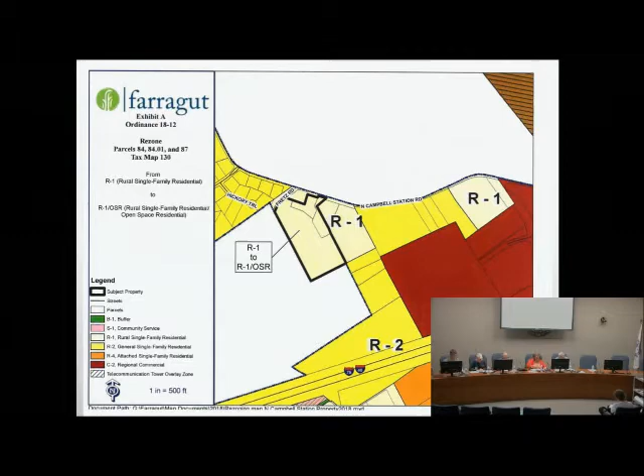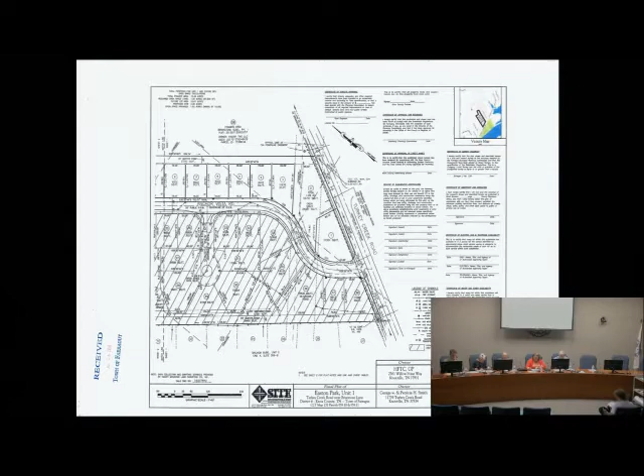Item number 7, discussion and public hearing on concept plan for the Ivey Farms, parcel 52, 54.01, 57, tax map 151, 114.32 acres, 213 lots, zoned R-1 OSR, site incorporated applicant.

This property on Union Road, north side of Union Road between Saddle Ridge and Fox Run, was recently rezoned to OSR. Previously, it had been mostly agricultural. As required in the OSR district, the concept plan has to be submitted to show how the full build-out of the subdivision would occur.

The applicant's design team and staff feel they've done a really good job with the layout, incorporating both vehicular and pedestrian connectivity within and externally to the development, which is required in our subdivision regulations and comprehensive land use plan, and is highly recommended. They've also included a very substantial walking trail system throughout the development that would tie into trail sections in both Saddle Ridge and Fox Run.

They have a large bioswale and a pretty robust tree planting plan as part of their streetscape plan. They've designed very well with the land and tried to avoid the drainages that bisect the property, along with the wooded areas and steeper slopes. There's a lot of open space, particularly in the northern portion of the property, which has more environmental constraints.

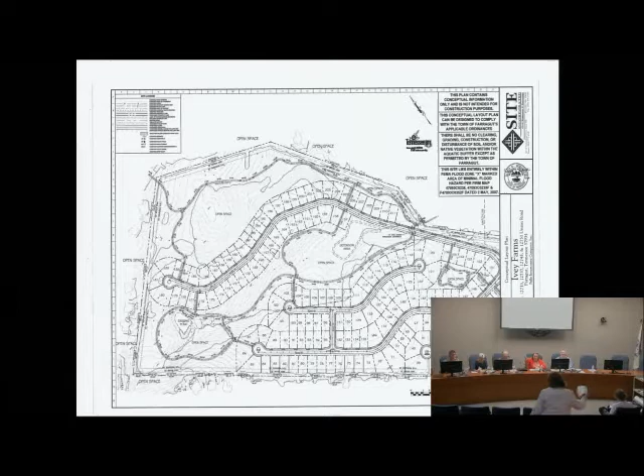Is the applicant here? I'm here, Robin Askew. This is David Robinette, the civil engineer from site.

I'm Robin Askew, I'm the attorney for the applicant. I know nothing about swales or retention or any of that, so we'll let David address those issues. I'm just here to respond to any issues that come up with respect to the regulations.

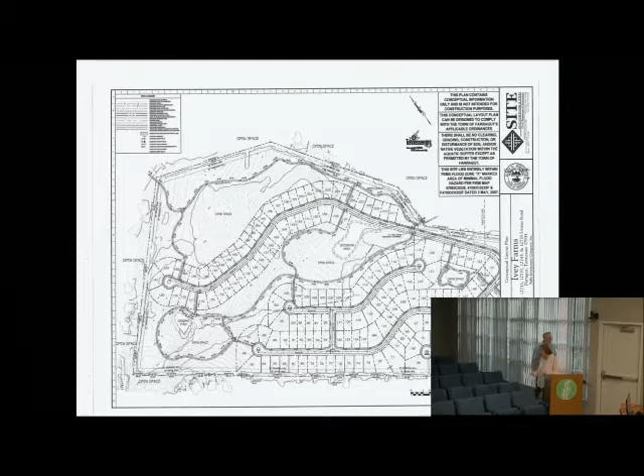David Robinette, 228 Oren Road. Sorry I'm late. You didn't expect us to move this fast, huh?

We read all the conditions, we're good with everything. Obviously on the 114-acre site, there's a lot of things that's going to be worked out during the preliminary plat stage, so we're good with what we have.

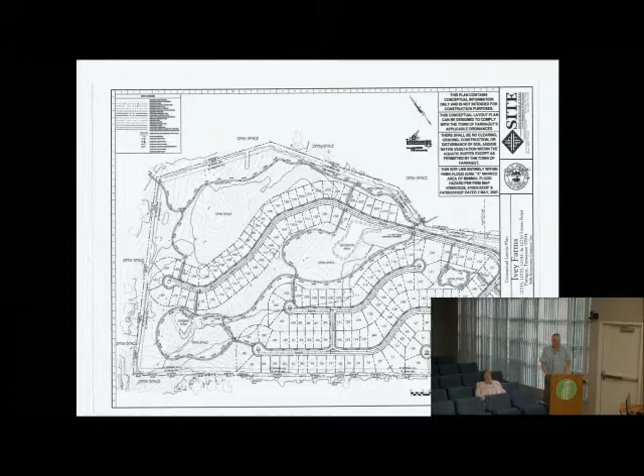Okay, any other opportunities for pedestrian connections over to Saddle Ridge? There's one, you see the one at the top left of that screen right there.

Is that Saddle Ridge or is that Fox Run up there? Well, that's Fox Run. There's no sidewalk in Saddle Ridge, that predates a lot of our pedestrian connections.

There's one opportunity, Mark, I don't know if you can see it or not, but there's a cul-de-sac that dead ends almost at the property just north of that area, right in there.

If you drive out there, those folks must have a good time at the end of that cul-de-sac. Yeah, there's a fire pit and all kinds of stuff there.

It could connect there. I don't know if the right-of-way actually goes all the way to the property line. It looks like it's short of the property line, but there is a cul-de-sac that's within 15 feet of the property line right there.

I'd like to, it'd be nice if we could get - you guys have done a great job with a lot of circulation, pedestrian circulation, and I applaud you for that. It'd be nice if there was just a little more connectivity, but it may not be possible with an older subdivision.

We just didn't allocate future connections like we do today, but if we could, I think we've got a couple over to Fox Run - one down by probably where the Fox Run clubhouse is, my best guess. Then you've got one up at the top of the hill, probably close to that water tower. And we're going to connect through our clubhouse out at the front to the 10-foot trail that's going to be built along Union Road.

Well, you've got that pond behind, you've got some topography - it doesn't make a whole lot of sense to battle that topography up there by that pond to try to connect those. I mean, I think they've done a good job of putting this plan together.

It'd be nice if we could figure out maybe another pedestrian connection on the west, southwest side of this up to Saddle Ridge, if we could figure it out - it just may not be possible. There's a detention pond on the left-hand side of that sheet where Saddle Ridge is - you see where it says open space right there? That's actually a detention pond that we might grade-wise be able to get area, something. And if that's - those contours are fairly tight in there too, but maybe you could work across the slope.

But I mean, that's going to require - I'm sure that's owned by the homeowners association over there, so you may or may not get cooperation. I don't know, but it seems like that would behoove everybody.

Because it'd be a nice walk. Having all those paths that go through your open space for folks that jog or walk or whatever, it seems like everybody would really enjoy that. It'd be really an additional amenity for Saddle Ridge with no cost.

Yeah, the one in the upper left would connect to Fox Run, but it's also connected - that segment goes down to connect between Saddle Ridge. Right, that's the one that connects both. Yeah, that's up there by the water tower, I think, and gets you down to the gas line easement or TVA - yeah, there's a TVA transmission easement where they changed the poles on a couple of years ago.

So that gets you through to Saddle Ridge that way, and it helps connect that street. That, and like I said, there just may not be another obvious location to connect.

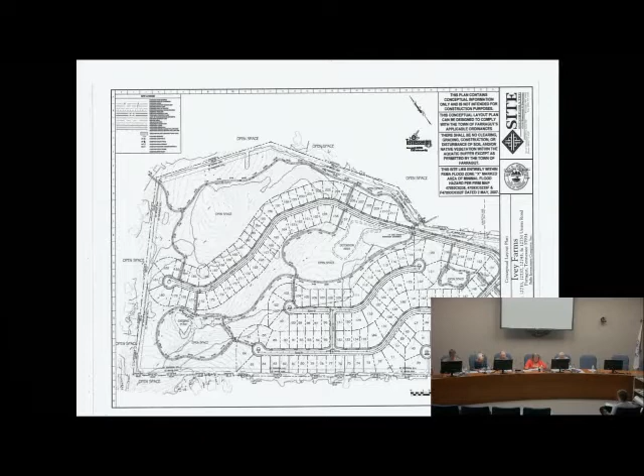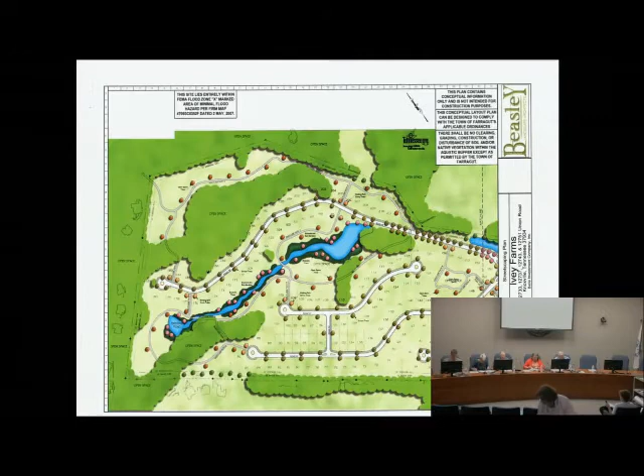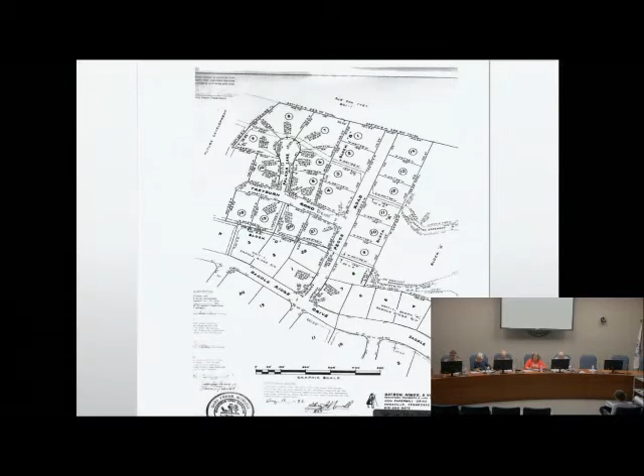I thought we're making pretty good progress tonight. Discussion and public hearing on approval of the request from Comcast to install underground conduit along portions of Parkside Drive, North Campbell Station Road, Campbell Lakes Drive, and Lake Edge Drive. Comcast is the applicant.

Are you here for Comcast? Well, I told him he probably wouldn't need to be here until about 7:45, so I was wrong. So anyway, I could go over this project briefly, and if you have questions, they probably will be here pretty soon.

We've met with the designers and the applicants two or three times to make sure they get the conduit within either existing platted right-of-way or existing utility easements that are normally along property lines or just outside of rights-of-way. And they've done that with their plan.

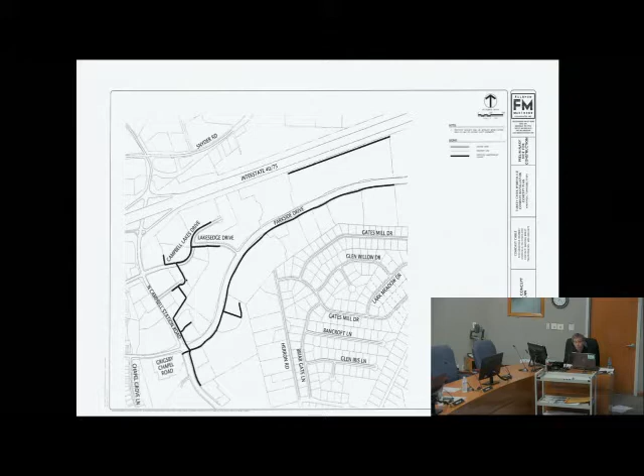We got through, oh yeah, there's Billy. Hi, Billy Fulgham, 10330 Hardin Valley Road with Fulgham McIndoe and Associates. I apologize, I didn't hear your question. Oh, will Farragut be able to have Comcast?

I don't know. It's agreements and all sorts of bureaucracy that have to be navigated, hoops have to be jumped through for that, but I'm not real sure. It'd be nice to have a little more competition, wouldn't it? It wouldn't hurt our feelings.

I can talk to you about the conduits, but not about that.

Billy, while you're up there, the line that goes back along I-40, next to the walking trail, those utilities that are in that easement now, those are overhead, correct? Because you're right next to the electric back there along that trail, behind the stores. Or are those also underground?

They put underground up there. Well, I think the ones next to I-40 might be overhead, and then they go underground when they pop over to Parkside Drive. I think we asked Adam about that, and I don't remember, but it seemed like it was something related to the existing overhead users not wanting that additional user.

I don't know, that's kind of vague. Right next to that trail, obviously with directional bores the impact is minimal except at your pedestals. So I'm just thinking it may be that everything in that easement is overhead except what this is, so you don't have a whole lot of conflicts. But otherwise, it's going to be real tight to get it in right there.

I'm trying to understand exactly where this conduit is going to be affecting greenways - can you clarify that for me? Well, there's a lot of pedestrian areas that are inside right-of-ways and easements, and that's a natural place for utilities to go. I'm just trying to understand where, on Parkside, because I walk in that area. My question would be, how long do you expect those greenways to be unusable?

If you're digging them up, we won't be able to walk on them, correct? I'm just trying to understand.

Except wherever their connections are. They have to get a boring machine to have access. It actually bores underground for a long distance, and then it pops up. They basically make their connection and put in their little pedestal, a small green pedestal sitting around.

And then normally with stuff like this, they won't close the walking trail. Obviously if they had an issue with rock or something unforeseen, there might be a temporary closure. But most of all, what they're proposing is very common with other underground utilities. They go where the sidewalks and walking trails go. That's just part of it, the natural place to put those utilities.

We hope there wouldn't be any closure unless something happens, like they hit a water line or gas line and have to dig everything up to fix it. Then they'd do what they need to do, and maybe close it then. So it would just be something unexpected.

I'm sure it's something you'll get to fairly quickly if that happens. Yes, the production work was going to be with that boring, so if they encounter anything else, they need to get that done fast. So are we adding a letter of credit, or does number 3 take care of that?

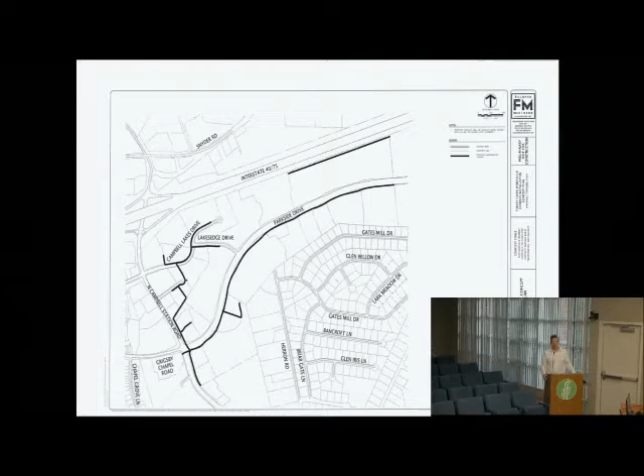Noah, are you going to make the motion? I am. I'm going to make a motion to approve a request from Comcast to install underground conduit along portions of Parkside Drive, North Campbell Station Road, Campbell Lakes Drive, Lake Edge Drive, as well as I-40, subject to items 1, 2, and 3, and posting a bond or letter of credit as deemed appropriate by staff.

We only accept letters of credit, so you might want to revise that to eliminate the word bond. Second? Second. All those in favor say aye. Aye. Opposed? Thank you, Billy.

Yeah, we don't really want to use a bond.

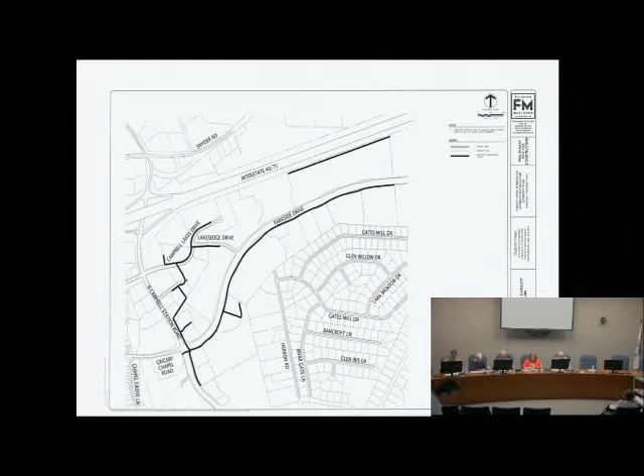Item number 9: discussion and public hearing on the site plan for Knoxville Farragut Storage LLC, 11775 Snyder Road, 6 acres, Zone C-2, Knoxville Farragut Storage LLC applicant.

This involves a site plan for the former U.S. Golf site at the western intersection of Snyder Road and North Campbell Station Road. The proposal is for 3 freestanding self-storage buildings, 2 of which would be 1-story, and 1 that would be 3-story. As you may recall, a conceptual site plan was presented to you back in March.

Since that time, we've formally removed mini warehouses from the C2 zoning district, but this particular property was temporarily exempted from those provisions, since we knew they had the intent of developing this as a mini warehouse.

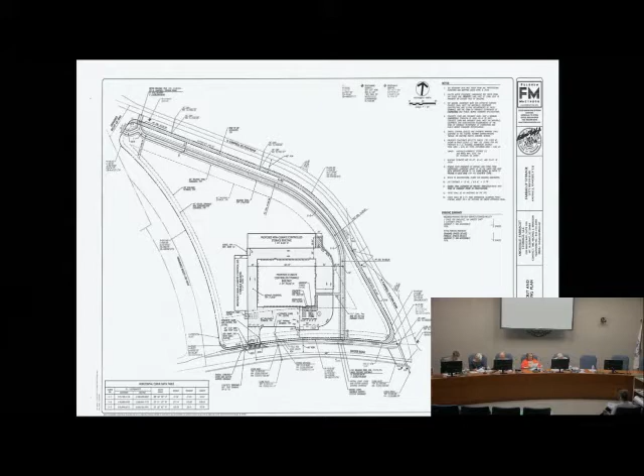The existing building and most of the site would be demolished and redeveloped as part of this. They're also moving the driveway access further to the west, further away from the intersection of Snyder Road and Campbell Station Road, which is a good thing at this point.

There is a platted right-of-way along the western portion of the property, but whether that ever becomes a public street is kind of up in the air at this point. That was platted many years ago in anticipation of possibly relocating the interchange, which hasn't happened yet, and we don't know whether it will anytime soon.

So for the short term, the access point is in a preferred location. They're also constructing a walking trail that would basically parallel North Campbell Station Road, which is a substantial benefit to the town. In staff's opinion, it's a pretty long section of walking trail, and it's very well separated from Campbell Station Road.

They also have a landscape plan going to the Visual Resource Review Board next week for the project's landscaping, and they'll have some street tree plantings along the walking trail.

The remaining staff comments on the site plan are at your places, and probably the one that needs a little more discussion deals with the buildings themselves.

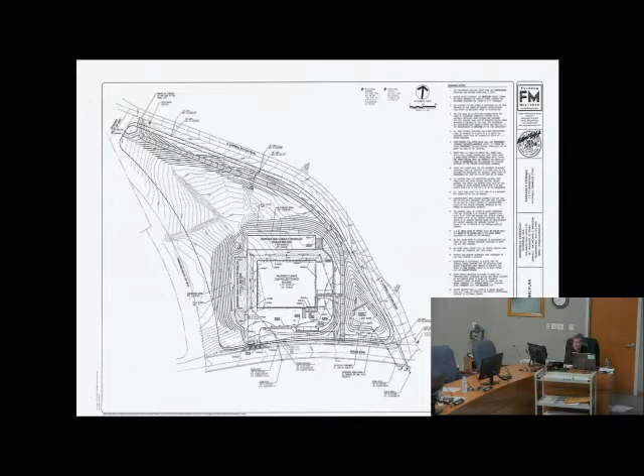This is the grading. You can see most of the grading is within where the existing development is present. This is what the one-story buildings are proposed to look like.

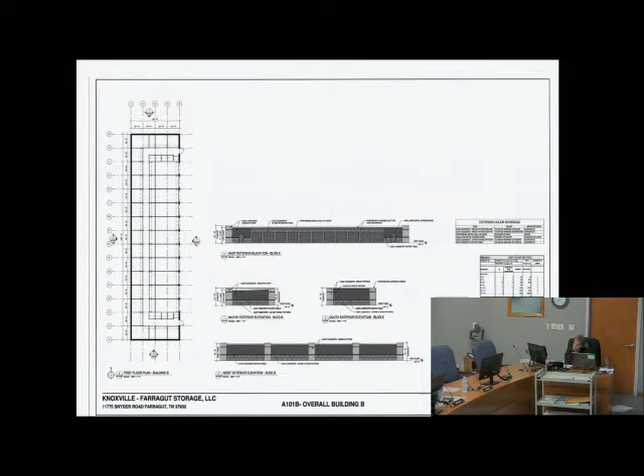The architect is here, and she can go over the appearance of all three buildings in more detail and the materials they're proposing. We certainly think some of the materials would constitute masonry, but there are others that we do not feel would meet the language and requirements of the architectural design standards in terms of masonry.

They are proposing some concrete areas, and the design standards require that if you're going to use detailed concrete, it has to be in a form that resembles traditional masonry panels. It has to be detailed such that it's similar in scale to genuine brick or stone, has to have mortar as part of the material, and has to be mortared in place to have that authentic look of masonry.

With that being said, I think the applicant's architect is here, and she could go over what they're proposing and answer any specific questions you have. I've got the old materials board, I don't know if that's still relevant, or if you wanted to come up and show anything.

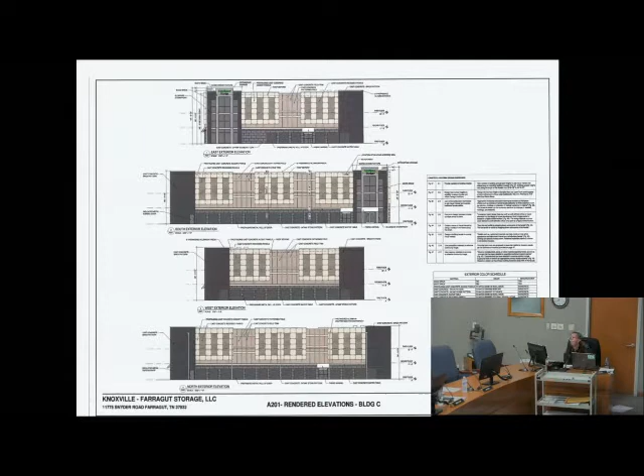Have you anything on the civil aspect of the plan? Well, we've got some civil work out, where the cut lines are to fit into the topography there. We're moving some of the trees.

Are those slopes going to be just seeded? Any riprap involved in any of those? No sir, they'll be seeded and matted. So like 3-to-1 slopes? Yeah, 3-to-1. 2.5 to 1 on this one, I think. Just have to be matted on the west side, that's about as steep as you can mow. You mow it, I wouldn't want to mow it on a tractor, but you could walk behind it and mow it.

I want to say thank you for that walking trail. We always hoped we'd get a walking trail through that property on that side, all the way up Campbell Station. We know it's a big expense, and it's a great community amenity, and we thank you for that.

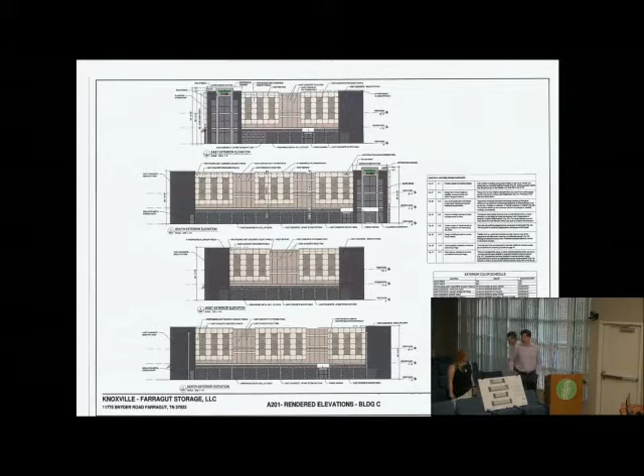Tell us who you are and give us an address of your business. Michael Manson, owner representative of the property on Snyder Road. Mailing address, 200 Wingo Way, Mount Pleasant, South Carolina.

Gretchen Weaver, I'm with SAA Architects. Address is 600 North Hartley Street, Suite 150, York, PA. I brought those.

Yes, we'll open it up to you all for any questions that you may have. Obviously starting with Billy, what you just did, and then anything associated with the architectural.

Yeah, that's still the same information. Thank you for saving those.

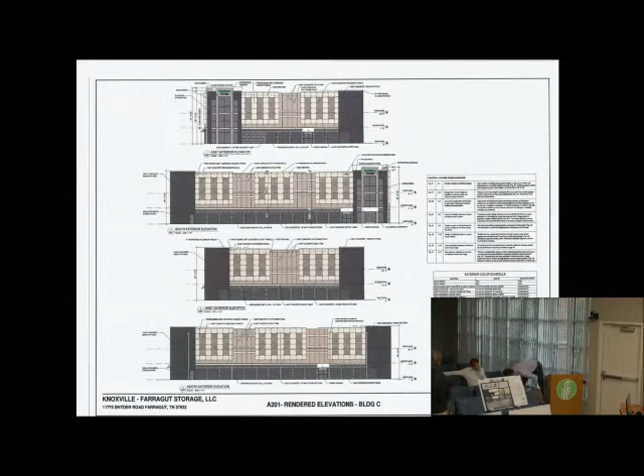I think it's remarkable, you guys. I'm seeing maybe just one retaining wall that's not that tall, and I knew that site someday was going to be tough to figure out how to put a grading plan in there and deal with that topography. The only one I'm seeing is at the northeast corner back there, which looks like a little short couple of feet, and that's it. I think it's remarkable that you guys figured out how to do this.

Obviously, I assume you're using the back of the storage, actually incorporating the foundation wall into your retaining wall, which is a great way of two birds with one stone. That way you can hide it, you're not looking at dealing with that retaining wall's maintenance and expense. So I applaud you with that.

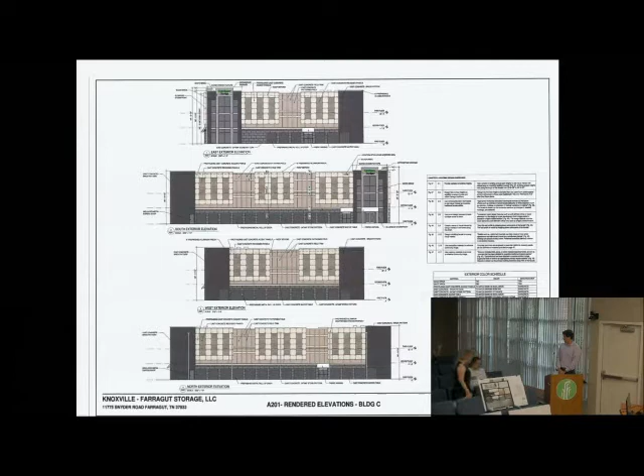Do you want them to go over the materials they're proposing specifically so you all have a feel? Yes, I think any other civil design or site design stuff that anybody had questions about, and then we'll jump into architecture. I think we're pretty good with your civil design.

Obviously, you've eliminated one of those curb cuts, and we're happy about that. And your walking trail is awesome, and you've done a good job with it with that site.

Oh, that won't be an issue. That's a typo, had to be.

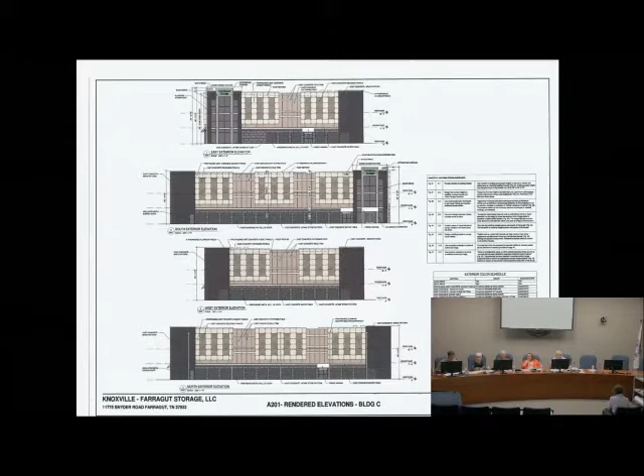What we can see here—Mike, could you help point at stuff on there for me? So we have black and white brick options, and they are at the entry to the facility. That'll mark the corner of that intersection as well. And then beyond that, for the base, we're using a cast concrete. This is a blow up of the image.

These are 24 by 48, that's a standard stone size, and that does have the ability to have a grout joint, so we would have that filled. This would be a stained product, and it won't have a sheen to it. This is the mold, this is actually an image of the actual mold, so it has a little bit of a sheen to it, but in real life it wouldn't have that.

We are proposing that it would get stained about this color, which is a fairly natural stone color, mixed in with the regular concrete. For the areas that we have called out as the cast concrete that's brick, this is actually an image of the brick itself. This is a product that comes out of the mold, so you can see that there is a significant dimension to it, that this is actually created from real brick. And then we would be able to grout that joint if we chose to, or leave it as a rake joint, depending on how we want to use that.

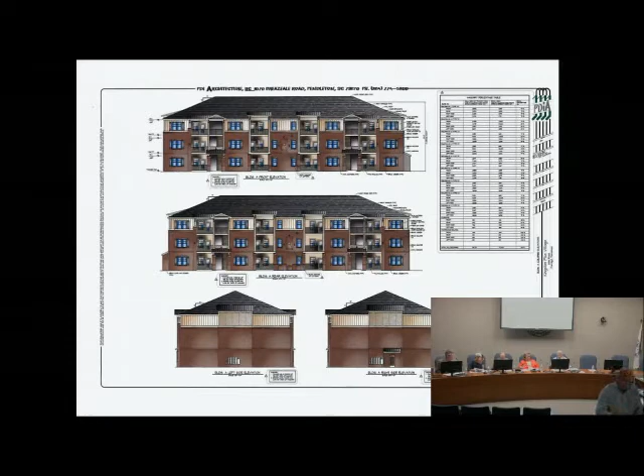This particular phase would include the multifamily portion. As you all know, there's also a big box that's part of the overall development and a couple of retail buildings at Kingston Pike. This particular phase would include, as proposed currently, about 228 apartments, and it would provide for the principal areas of open space for this particular development.

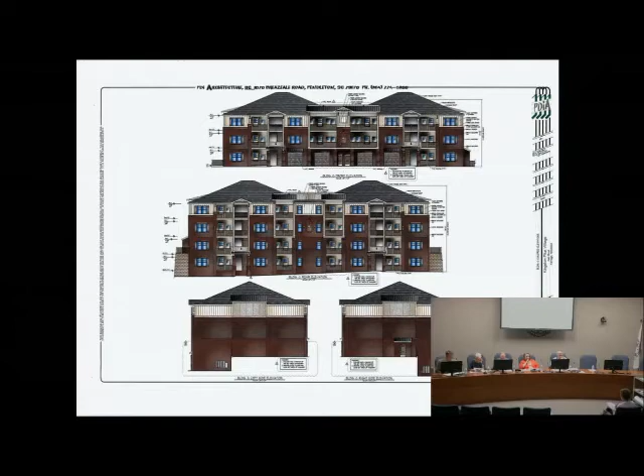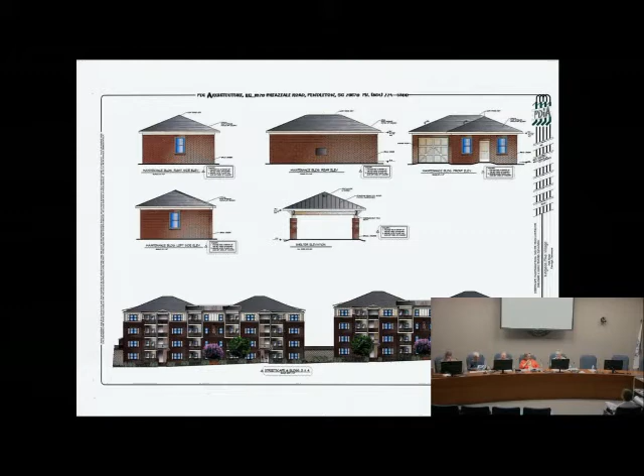These are some renderings of what the apartment buildings are proposed to look like. 3- and 4-story buildings, as you can see there. There's the clubhouse. And this particular phase, this is kind of what they look like from side view, street view. And then here's kind of an aerial view showing the green space and the buildings on the property there.

This is about 10, almost 11 acres of the 18.5 acres that's part of the planned commercial development. We talked about this as a workshop item back in December and then in January, and then there were some items that the applicant brought before you all last month for some additional clarification.

The staff would remind you that this is a planned commercial development, as we've talked about in the past. It is supposed to be held to a higher standard than what you would typically see in a regular multifamily or commercial development. There are certain key things that these type projects are required to have: integration within and to what's around them, good pedestrian and vehicular connectivity, a quality design, and then the provision for functional common open space that could be actively used.

The functional open space is really a key component of this type of development. It's a type of development that if you go to, it would signal something different from what you would typically see in this case, apartment development. It would have some kind of identity to it that you wouldn't otherwise be able to find in most apartment developments. The remaining staff comments on this plan are included at your places.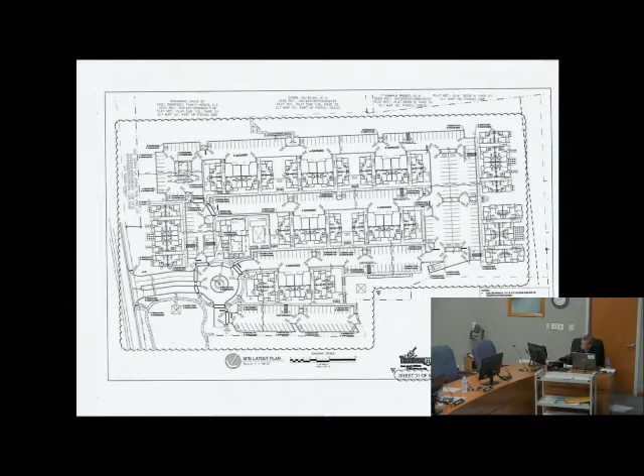And I don't know if you want to just talk about—let's do one at a time. Yeah, that's fine. I'm going to jump in. Yes, sir. Do we count the garages as parking spaces? Yep. So that's already been put into the calculation? Yes. So even including the garages, you're still short 41?

Well, if you remember correctly, when we came in front of you to rezone, our first plan, staff and y'all said it looks like a sea of asphalt. So we took out almost 120 parking spaces; we have not added any parking spaces from the concept plan. This is the exact number of parking spaces we've been having since the approved concept plan. You've subtracted parking spaces from the concept plan? Some for putting in the maintenance building, yes. We lost 8 spaces there. Where's the maintenance building? Is that the little gazebo out front?

No, that's the one up in the upper left, isn't it? Upper left, right? That's the maintenance building. Okay, so you lost some parking there.

We lost 8 spaces there. Well, we actually lost 6 spaces, but the 2 spaces that are there are also used for car washing. So if someone's washing the car, they're parked. But if they're not washing the car and somebody wants to wash the car, then we got a problem. We'll have to sort that problem out.

Are the garages 2-car garages or 1-car garages? 1-car garage. Okay, and so you're getting credit for one spot for each one of those garages. Yes, which makes sense. You park a car there, that's a parking spot.

Okay, and the tenants will, correct me if I'm wrong Pat, but 2 of them have access into units? Yeah, 2 per building. Each of the 4, 2 of them have internal access to a unit on the same level. Well, the one that suffers if you don't have enough parking is you and your tenants.

What distance would I have to walk if I parked on the grocery store property closest to the apartments? It depends on which apartment you're in. Well, to the front of where the apartments start, the building directly to the right of the roundabout, you'd be walking an additional 50 to 100 feet. Now if you're parked in Building 9, all the way in the back corner near the maintenance building, then yeah, you're going to be walking a significant distance.

I mean, again, going up grades, yes, you would be going up some grades. I'm not going to lie about that.

At the last meeting, the developer, who couldn't make it tonight, told you he's about to sign the lease for the big box. Once we get approved on this, he's already asked me how fast I can get the drawings done for the grocery store, so that all that parking is complete at one time. This is going to take 18 to 24 months to build, correct me if I'm wrong, Pat, and the grocery store will take about 9 to 12 months.

If we're following right along, the parking will be there. I understand Mark's concern, and it's a concern of ours too. We really were trying to get the numbers up to 1.75, but if you remember correctly, when we were going through the concept plan, we kept being told take parking out, take parking out.

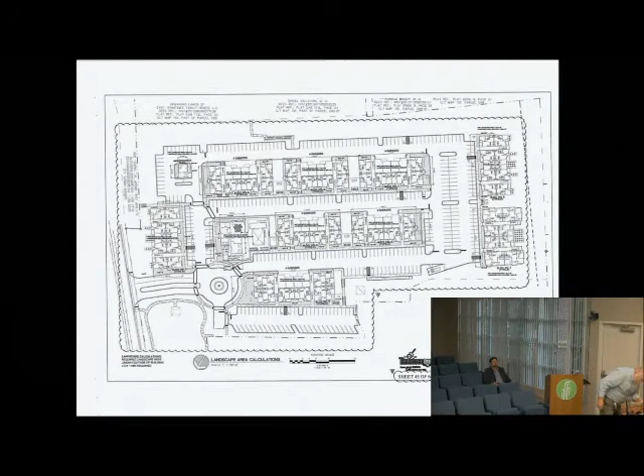Is it like that roundabout? No, this one here. We're doing that as a calming device, a speed slow down.

Excuse me, let me get back in front of the mic. We're doing that because there's a trench drain right before it, trying to catch the stormwater, to encourage capture of stormwater.

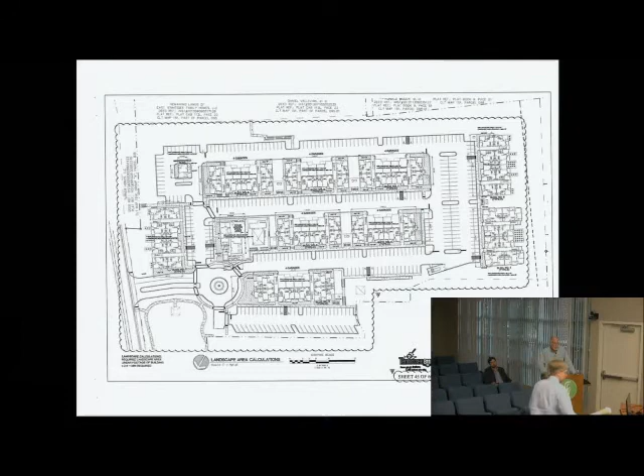That is an expense we may not need to do, because I don't think we really need a bump. We may instead do a channel drain, a 12-inch wide trench drain across there, which can capture a whole lot of water before it gets out, going from curb to curb.

I guess what we're saying is if you're going to do the raised crosswalks, we probably need to know what they look like, and if you agree, we want to take them out, that's fine, as long as the engineer can determine whether your storm drainage works. That's why I said, if we put them in, I will provide a detail.

Item 24, that's something I've got to get from Alan Childers. We just haven't had a chance, him and I have been playing phone tag.

Signage, that should be easy. We have stop signs on the site layout plan now. Well, maybe you need some cut sheets or details as well. There's a detail on the detail sheet for a stop sign.

Well, you can just coordinate with staff on that. Okay, coordinating, yeah. Item 26, I'll coordinate with Daryl. Item 27, yes, we'll coordinate that. Items 28, 29, 30 are all standard things, so those are just fine.

So what I'm hearing is that you want to spend some time talking about the parking, shared parking items 2, 3, 4, and possibly 6.

Six is something that Pat and I need to coordinate a little bit more, so I'm going to put a check mark by that. Pat and I can coordinate that a little more, because that's the screening and stuff, like where we're going to put where we expect to have a transformer screened or whatever.

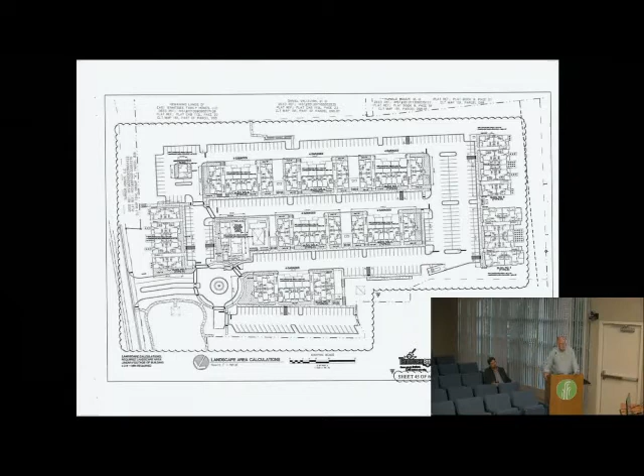I think I have your master plan. Why don't you come over and verify that this is the plan you guys are working off of? If it's an incorrect plan, then we're wasting our time looking at it. I can tell right now it is.

I wonder if there'd be a better location for the commissioners to take a look at this, other than me sticking it in front of Miss Betty. You mean put it in a chair next to Ed, or I could come here. You know what, I got an idea.

Let me try this. This doesn't help the folks in the audience or folks at home enjoying television on a Thursday night. I'll put it on this board. We've got a big audience tonight, I bet.

Why don't you come over here? No, there's some clips on this if you want. Marcus bringing out that light thing, he's gonna do some magic. Anybody in the audience that'd like to come up and take a look at it?

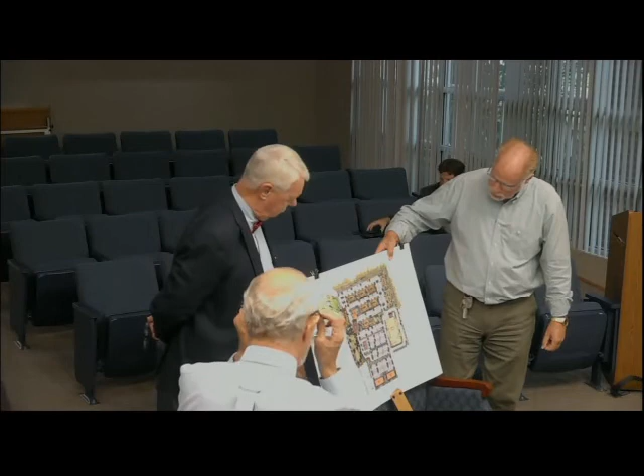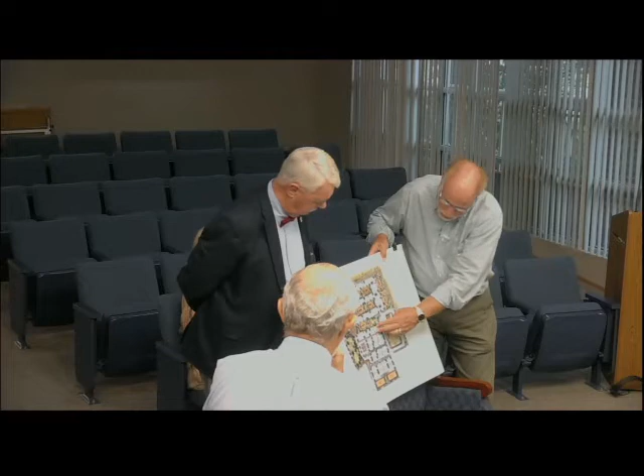Mr. Bilek, why don't you start pointing out where you envision this overflow parking for your apartments to be? In this area, well, this area right here is already allocated. This area right here and some of this area right here.

Because, be honest, how many times do you see many people park near a gas station? Well, you're right, one employee may be in there, and that's it. So, except for this being a grocery store, except for Thanksgiving week or Christmas week or a holiday week where they're getting a lot of traffic,

all of this area right here will probably never be parked in. This area, and some of this area over here, probably won't be parked in either. This parking right here is for employees.

I don't know how many employees this grocery store employs, but if it's more than 12 or 17, they can go right in here. But 17 is already being eaten up right here. So there's a lot of extra parking on an average day for this grocery store.

The unusual days, like the week before Thanksgiving, the week before Christmas, any major holiday, that 4th of July, where people are gonna go barbecuing and get their supplies, they're gonna be here during the day, but at night, if need be, they can use this area right here and this area right here. From here to here is approximately 100 feet.

Show us the route if you were going to go up to that open space area. Right here? Yeah, show us that route. You don't want somebody to walk all the way over to the roundabout. No, and they don't have to. They don't have to.

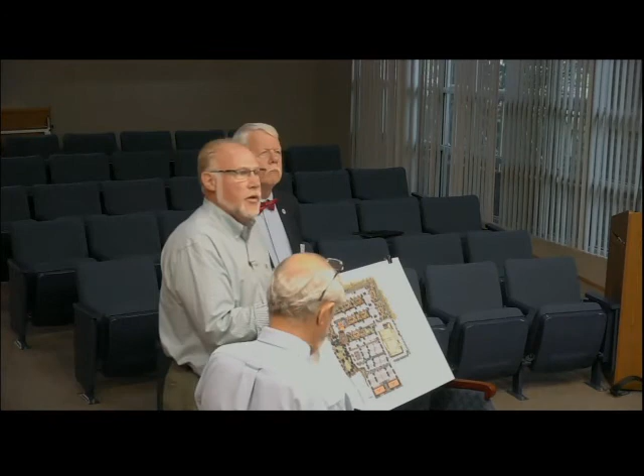This is a set of steps that comes up into the open space. This is a handicap space for someone who wants to, whether they're coming from down here or up in here, they can come in here, park, and this handicap ramp gets them down to the elevation, because we've--

Of the raised grocery store. This gets you all the way down to the green space, because it's 6 feet above, so it's that terrace that we talked about a few months ago. I think actually I like that idea.

I'm just trying to figure out, we have a set of steps here that go up from the terrace area up to the parking. And then from there, you could go across on the sidewalk to get to this apartment over here. Yes, it's a long walk.

Unfortunately, life deals us some curveballs every once in a while. Well, like I said, it's not us that could potentially suffer. It's your client's tenants. So we're just trying to figure out, does this make sense?

Are there other tools we could use, would it make sense to occasionally have a parking spot designated as a pickup drop-off area? And most importantly, I think, is there enough handicap? Now, you get credit for your handicap spots. Is there enough handicap? Because we have more than enough handicap.

In fact, that's one of the things. Whatever the normal ratio is for apartments, I would think we need a little bit more handicap spots than typical. We have, I'm trying to remember, 2, 4, 6, 7... 8, 12, 14, 16 handicap spaces for this apartment, which, correct me if I'm wrong Pat, but we only need about 9.

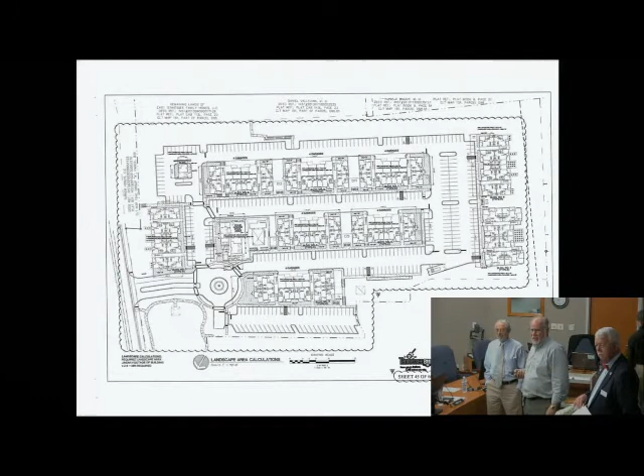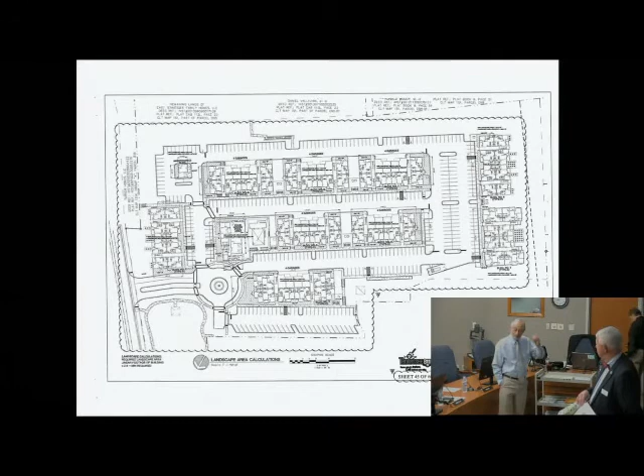Oh, put you on the spot. You have that on one of your plans, Mark? Actually, you have. It might be. Seems like I saw that somewhere. Yeah, it's not in that one. Not on the elevations. I think I saw it on a site plan. You know what? I think it's in here.

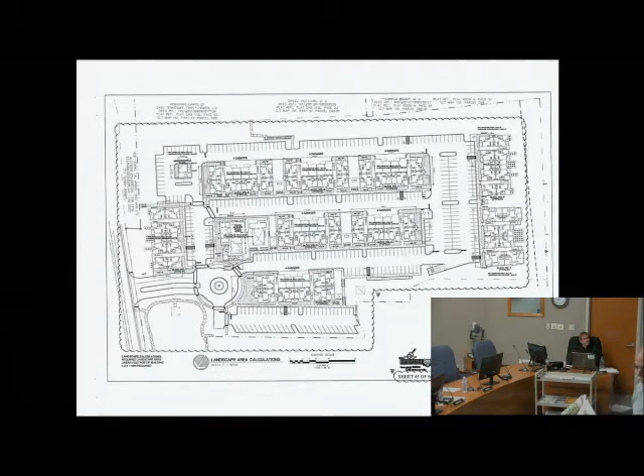I apologize, I should have that ready, but what I was wondering is, if you have so many one-bedrooms, then realistically you only need one parking spot per bedroom. I did a project in Knoxville, downtown in the waterfront area, and they dropped the parking ratio down to less than 1.4 per unit. I thought that was interesting. Maybe college students without cars.

I guess I like where Rita's going with this. The problem is our ordinance does say one thing, so we've still got to figure out how to address this. If you have an abundance of one-bedroom units, the odds of needing 2 parking spaces all the time are low, you might have a guest come over, but generally you're gonna have 1 car there. Yep, and it'd be kind of nice to know what those ratios are.

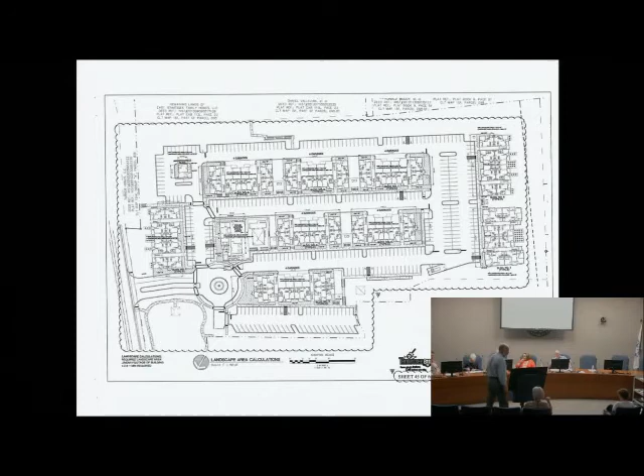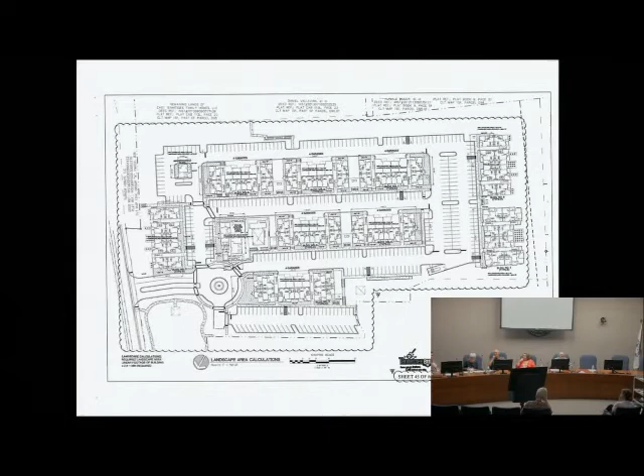I thought we had that on one of the plans. I don't remember actually, I apologize. I can tell you we have a relatively few number of 3-bedrooms. I think 18 3-bedrooms, which is right at a 10-11% ratio, I think. And I think we're close to 50-50 with 1-bedroom and 2-bedroom units.

I think for me, 3-bedrooms would be family units, 2-bedrooms might be roommates, thus you'd have 2 cars. And then 1-bedrooms, odds are 1 car, unless you're having a Super Bowl party and have a whole bunch of people come over, and then guests can park in the overflow places. I've seen 20 years ago the thought process was 2 spaces per unit.

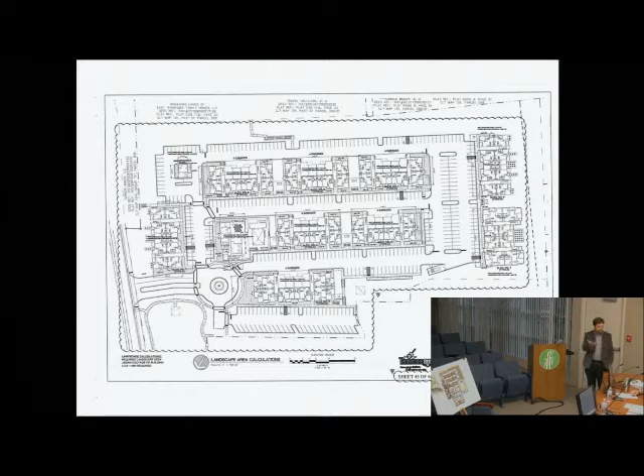And it has, like what was talked about, been coming down since the last 5 years, I think. The younger generation now, it's changed. Part of it is for the same reason you have the bike racks included in your requirements, I mean you get a lot more of that. Yes, which we do have a proper number of bicycle spaces.

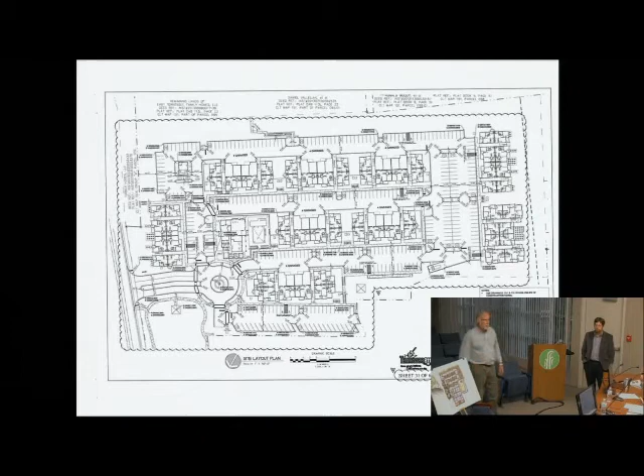I mean, Mark, correct me, we're 41 spaces off, correct, from the parking ratio? Out of a total of what? How many total parking spaces do you have for the apartments? Let's put this in perspective. The number I'm thinking is 358, that's what we have shown for the whole development on the plan right now.

So a little over 10% deficit. It's not that high, I don't believe, Mark. Is it not that much? I bet that's for the whole thing, like Pat said. That sounds pretty high for... well, how many total units? Hold on, I've got it guys. How many units? 556 units - no, how many total units do you have? Let me do the math. 228, well 228 times 1.75, right?

Okay, let's do the math here. So you're required to have 399, and we think you're 41 short, so you're at 358. So you're about 10%, if the total requirement's 399, 10.5% roughly speaking.

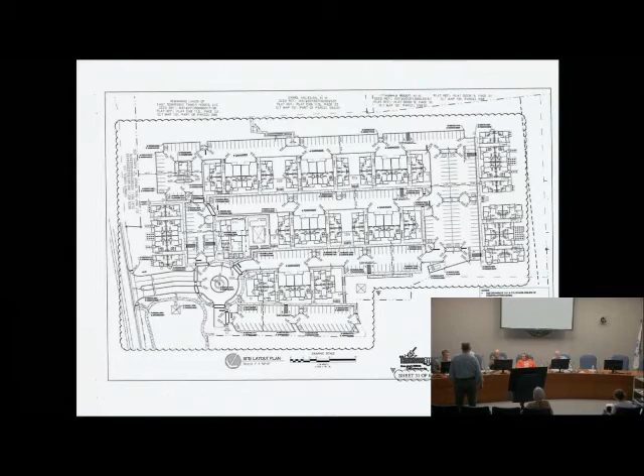Well, like I said, it's your tenants, it's your tenants that may be unhappy with it. I'm starting to drink the Kool-Aid with the overflow parking down there by the gas station. I mean, it is possible, even though you may not want to climb up that hill, it is possible to do that. You just need to think long and hard to make sure you're comfortable with that.

Again, there's going to be peak times, you know, Super Bowl Sunday I guess, so everybody's going to run out of parking, it just is what it is. Well, Super Bowl Sunday there's not going to be a lot of people at the grocery store. Unless they can run there real quickly during a commercial and get more beer.

But more importantly, the developer is comfortable with it, and it's ultimately their business, their product, and if they've got unhappy tenants, that's going to affect their bottom line. And this concept plan right there is what they've been using to do their market studies from, and the market study is what the financial people follow. Correct me if I'm wrong, he has a lot more experience with multifamily than I do, but I know this plan has been what they're driving all along. Once we got the concept plan for the rezoning approved, this is what we're trying to follow.

I think we are doing pretty good, other than finding out we're about 6 spaces short from what the concept was in this area, because we had to add a maintenance building that the developer wanted to maintain his facility in a productive way. For me to get comfortable with this item, those other 41 spots, 358 to 399, are going to have to be constructed as part of this project.

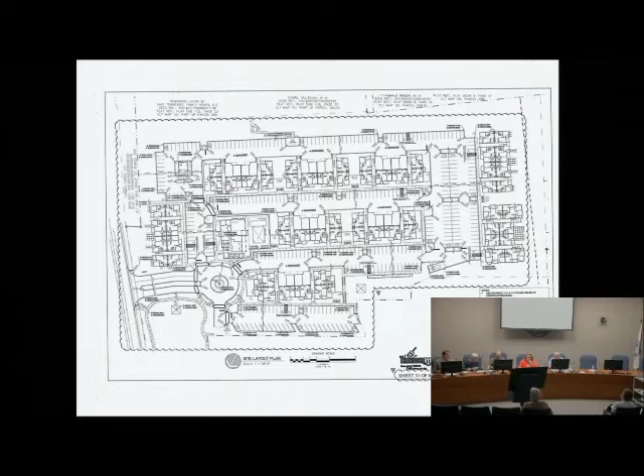I suppose eliminating a building is not an option. No, that's the only other alternative, or some kind of parking reduction. Well, if you eliminate a building, we just lost the whole project. Yeah, but you'd have to cut out 20 plus units. The smallest building is 24 units.

So at the 1.75, like I said, I'm okay with it. Someday you may have a tenant cussing you and you get to deal with that. Well, we're going to tell them my developer told them to deal with it, not me. Right, not you. At least if I get a phone call about that, you get to meet the second one.

You'll need to show shared parking requirements and demonstrate that on the plans, because that's in the ordinance. There's some legal documentation you'll have to deal with, which is not a big deal, but nonetheless you've got to deal with that.

Let me ask this question. Isn't it already taken care of by the plat? Well, there's other things that specifically address shared parking, in addition to that. Like the long pedestrian path conversation we had about shared pedestrian pathway. Did they not take care of that with the plat?

Well, that's just one aspect of it. You have to show how the pedestrian is going to get from one to the other. If you're saying that part of the parking's not within the multifamily area, what's the pedestrian way? It's got to be within 500 feet, with adjacent sidewalks and everything.

That's the stuff I told you, that's in there. We'll show the sidewalks associated with the parking. That's not a problem, but you'll have to. I mean, it'll have to be reflected on the plat too, obviously, because that would be an easement.

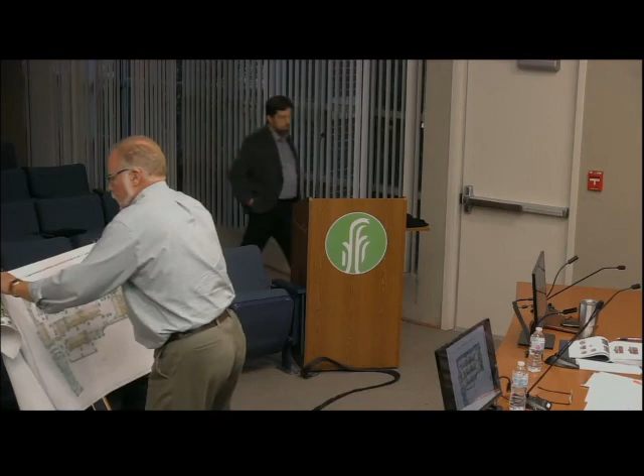Okay, why don't you show us, let's see if we can get a little, I'm looking at this one, which is not indicative of what you're proposing, so let's look at what you are proposing. Wouldn't it be like this version of the open space in those small sheets? That's what was approved on the concept plan. We did do a blow-up of just the grading plan of that area.

Draw the contours of the detention. You gotta be kidding, I can't - to me I'm not seeing it, I'm just seeing the pond. Where's your flat area? This whole area here is flat. There's an upper level right here. So it's like a terraced level up there, a little bit darker for that. Okay, sloped area, and at the bottom we're going to put some water, keep some water in it.

So you're actually going to be a retention pond now instead of a detention pond? No, it is a detention. It's called a wet detention, mosquito breeding area. Wasn't that a retention? No, it's completely different - it's still a detention because you're detaining the water that comes in. Right, but you are retaining year round. The wet part of it will be wet, anything below that will stay wet. The volume still has to be there. Everything above it is the detention. Is it gonna be aerated, or is it gonna be a mosquito breeding area?

No, we got a fountain. We're proposing a fountain aerator in it, and around the perimeter of it, as you can tell on the one that's on the screen there, there's some vegetation. There's a shallow area for about 6 feet that we can plant with wetland vegetation, which will also help aerate the water and encourage migration of birds and stuff to come in.

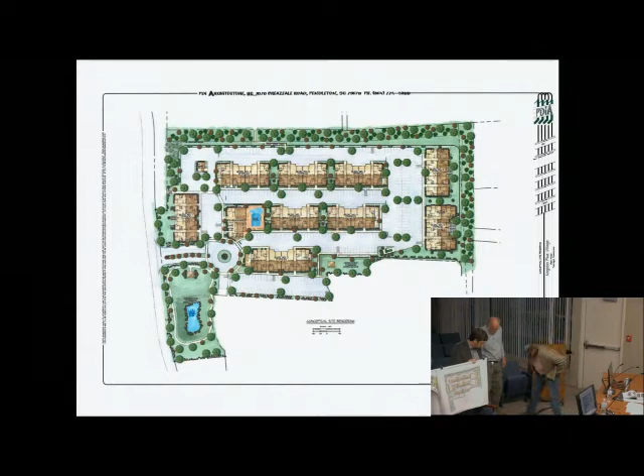We did a comparison at the staff developer meeting, and I'm going to get behind the microphone so people can hear me. The concept plan I had in AutoCAD, so I did the area at the top of the concept plan - I don't remember exactly the number - but then I did the area of the top of the berm for the pond we're proposing, and it's approximately 4 foot out from where we had it on the concept plan. In fact, when you overlay it, it's almost 4 foot out from the concept plan. Now, also in the concept plan, if you look at it, flip this up.

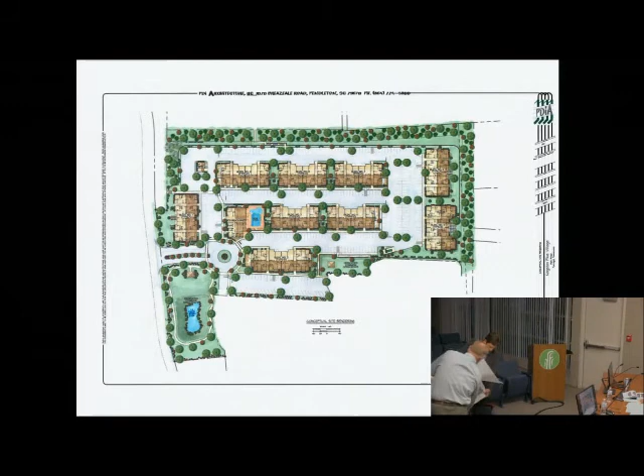You look at the concept plan, the pond was down close to the southern property line, kind of at the bottom of those stairs. Still have an upper tier here, but what the planner didn't take into consideration is there's an existing sanitary sewer line that runs through here. We cannot have the storm pond on that, or any part of its easement. That is why this is now pulled up some, and that affected the upper terrace.

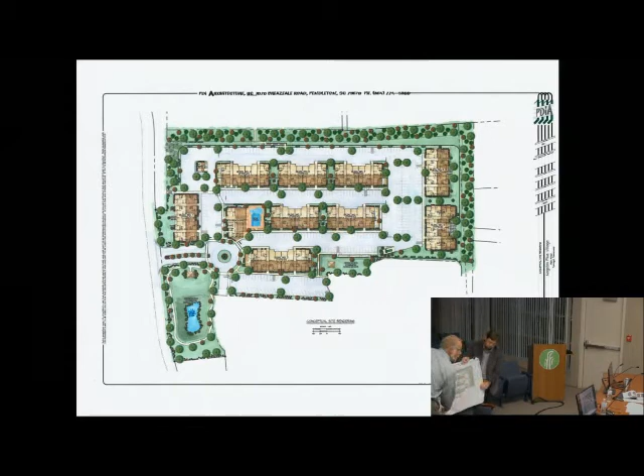Yes, because of the existing sanitary sewer system, which I've been working with First Utility on. When we go to the next phase, it's still going to be there. We can't touch it, we're going to have to relocate some of it that goes by the grocery store, take that out of service, and build a new line that comes down Kingston Pike and around between us and Little Joe's, per First Utility's requirements, not mine.

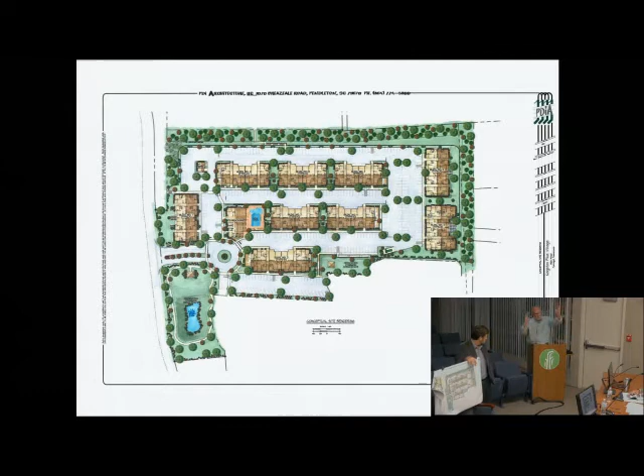Is that the main line that goes all the way to Dixie Lee Junction? No, just that one portion of it. That goes down towards Dixie Lee Junction. We're relocating a portion to run parallel to Kingston Pike and then come down between Little Joe's. We're having to relocate a portion that went underneath the proposed shops anyway, so this way we won't have a sanitary sewer easement anywhere near the grocery store, and it'll be at a depth that First Utility won't scream at us about. So that's all going to be part of the grocery store and commercial area plans.

There's site things that the planner didn't know, and I knew, and I couldn't get him to take into consideration when he was drawing the concept. So that's another reason why things got pushed and pulled and tugged.

Okay, so this one was number 2. Is everybody satisfied with what they've heard? I am. I think the applicant's going to need some direction. Do we feel like there's sufficient open space for the PCD as proposed, or is there not?

We've got to talk about number 3 as well, the western part, which is open space also. We're over the open space — the total area we're dedicating for open space is over the minimums required. Yeah, but it has to be usable open space. A lot of it's just area that's not really usable.

Originally we had it as a dry pond, and the staff developer, Louise, who's not here tonight, suggested what if we made it a water feature. We said that's fine, we'll make it a wet pond and put a water feature out of it. I think that's making it more palatable, working through this. We have no problem doing that. You've got the trail going around it, so you can push the stroller around the pond — seems kind of neat. I think we're warming up to it.

I think there's the western open space on item number 3 — is that the one with the terrace? Yeah, that would be the terrace. In regards to what we submitted last time and this time, we actually have more usable space now that I've changed the ramp system for getting down into it.

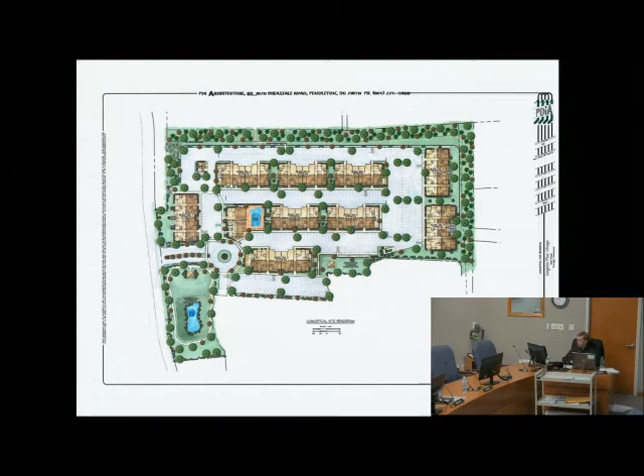Okay, and Mark, are you satisfied? That's up to you all, it's your decision. It's understood that you will work with staff on that line. Yes, I will be more than happy to work with staff to do what we can, legally.

To grade and lower the height of the retaining wall to ensure we stay outside of the 50-foot demarcation. Lowering the retaining wall height is up to you. What number 4 addresses is that we're going to leave number 4. I think the language in there covers everything we've talked about tonight.

So that's not going to be a problem, we're not going to modify number 4. But basically, to be clear, existing tree-covered areas within the transition shall be protected. That's something we're going to allow you to stake or fence with orange safety fencing, which is going to be required anyway, prior to you guys getting a land disturbance or grading permit.

And then we can look and say, okay, are there some other trees to deal with? I don't want to spend any more time, but I think we've got the language in there that addresses that. So we're not going to take it out.

No, I'm not saying it still needs to be addressed. I have no problem with number 4. I'm just saying what we're going to do is find the area we can grade outside of that.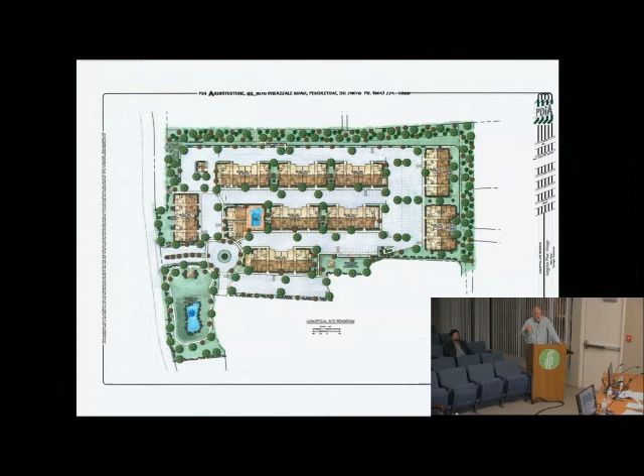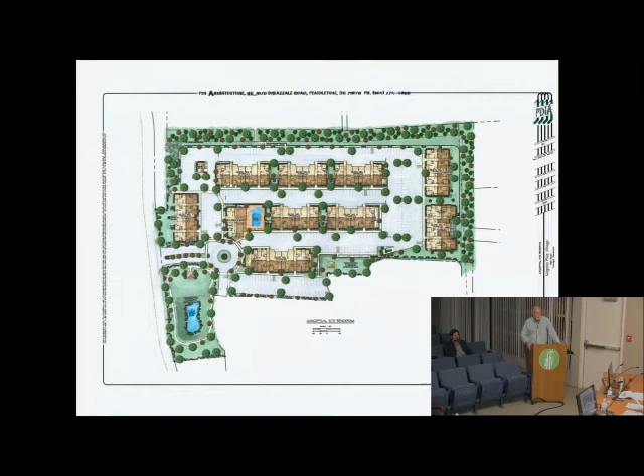Anything we can do to lower the height of the retaining walls, yeah, absolutely lowers the tieback length, which helps us stay out of the transition zone. And if you can reduce a 30-foot retaining wall, the more power to you, we'd like to see that.

Retaining walls were always a challenge on this site, and anything we can do to lower that just saves money on the project. So we'll be more than happy to take care of that.

Mark, are we scheduled to vote on this tonight? This is public discussion and public hearing, I believe. It's up to you all.

Is everybody on the planning commission comfortable with the number of subject twos and the fact that this is more than what we've been seeing lately, but we have it agreed from the developer?

We're probably going to need some consensus just to make sure we're all on board with items number 1 and 2, because if you leave the subject twos in there as presented, that's going to create an issue, Mark. So we just need to.

Number 1, we agreed to add 41 spaces, with the associated parking and sidewalks as required to meet the shared parking agreements, the shared parking easement. We'll agree to do that.

And then the other one was the open space. We want to make sure the open space is appropriate and meets the intent of the PCD. And I can't answer that, only you can do that.

Well, I'm okay with it, I'm okay with the open space. It's less than what we originally saw a year or two ago when we first started looking at this, but I do understand the constraints. I actually like the pond with water in it now, so I think that kind of mitigates losing some of that open space.

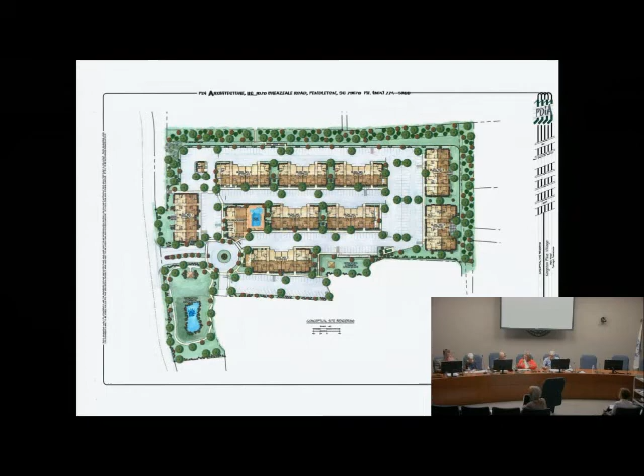Okay Noah, do you want to make a motion? Move to approve the site plan for Kingston Pike Village Phase 1 Apartments, 115 South Watt Road, subject to items 1, 3, 4, 5, 6, 7, 8, 9, 10, 11, 12, 13, 14, 15, all the way through 31 - all of them other than number 2.

Okay, do I have a second? Second. All those in favor? Aye. Opposed? Thank you.

Just remember, it ain't over till it's over. No, we're not done yet. You're still gonna have to see this ugly mug a couple more times. I apologize. Oh, maybe that's why you brought the black color there. No, I'll just turn - don't let me forget, after you're finished I'm gonna show you that brick. Okay, well we appreciate it. Thank you, gentlemen, for your time.

Okay, Bart is next. Item number 11, discussion and public hearing on the adoption of the Knox County, City of Knoxville, Town of Farragut Municipal Jurisdictional Local Hazard Mitigation Plan.

Mitigation plan, yeah, migration - and I opened up that PDF and said, oh, what have I done? This thing is so big. I went through it page by page and it scared me to death. I was like, I'm not even sure where I want to live. It's all scary. All right guys, thanks guys. Thank you sir, 400 something pages. My pad doesn't do that.